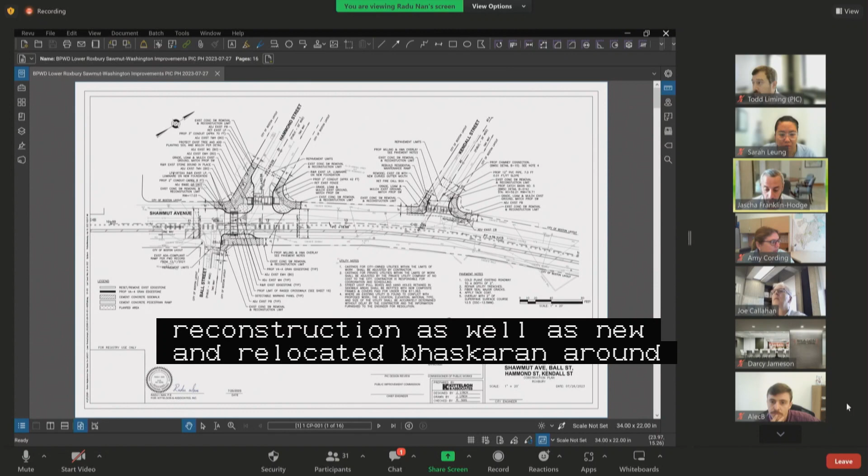So moved. On to first item of business, public hearing number 1, on a joint petition by the City of Boston Transportation Department and the City of Boston Public Works Department for the making of specific repairs within the following public ways in Boston proper and Roxbury, consisting of curb realignment, roadway and sidewalk reconstruction, as well as new and relocated pedestrian ramps, street lighting infrastructure, storm drain infrastructure, landscaping, driveway curb cuts, median islands, and raised crosswalks. Shawmut Avenue, generally between Hammond Street and Lenox Street. Washington Street, generally between Thorndike Street and Lenox Street / East Lenox Street. Hammond Street at Shawmut Avenue. Kendall Street at Shawmut Avenue. Lenox Street at Shawmut Avenue. East Lenox Street at Washington Street.

So it's new business on July 13th, 2023, as shown on a set of plans entitled City of Boston Public Works Department Engineering Division Specific Repairs Plan. Shawmut Ave, Ball Street, Hammond Street, Kendall Street, Lenox Street, Washington Street, Thorndike Street, East Lenox Street, Roxbury, 16 sheets dated July 26, 2023. Would the proponents please introduce themselves, their affiliations, give us a brief overview of the project, and let us know about any changes since your new business hearing. And after that, we'll open up the floor for commissioners to ask questions.

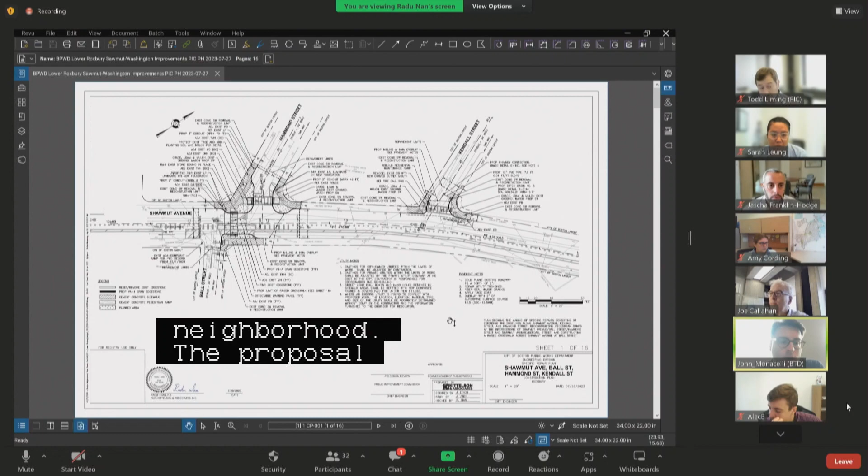Thank you, Commissioners. Good morning. My name is John Monacelli, representing the Transportation Department in this petition here. This is a joint petition with the Public Works Department. We've also been in close coordination with an advisory committee with the community, as well as the councilor's office, with these improvements to create and solidify various geometric and traffic calming elements in the Lower Roxbury neighborhood. The proposal includes some curb extensions and geometric changes, ramp reconstructions for accessible compliance, traffic calming measures such as raised crosswalks, street lighting improvements coordinated through the street lighting department here at Public Works, as well as some green infrastructure included into the depaving, in accordance with the depaving policies of the streets cabinet.

I'm joined here by our consultant representative, Radu Nan. We do have a few notes here. The plans on the screen have not been revised since the new business proposal. We have 2 to 3 outstanding comments, some from the street lighting department, as well as 1 or 2 from the Disabilities Commission that we are attending to. I'll let Radu speak for a moment. We'll take some questions, but ultimately we're going to request an approval on condition of addressing those to the satisfaction of the respective departments. Thank you.

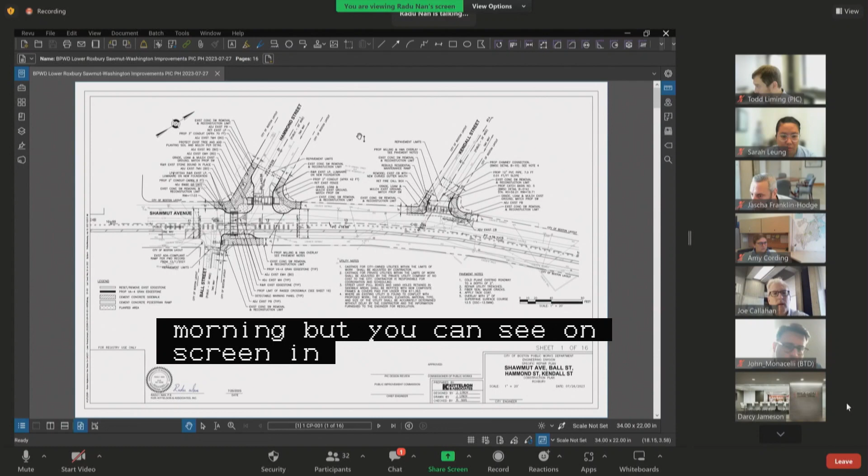Good morning, Chair and members of the Commission. My name is Radu Nan with Kittelson Associates, supporting the Public Works Department and BTD. I may go off camera because my internet is a little bit shaky this morning, but you can see on screen the first area of proposed specific repairs introduced two weeks ago, extending the curb lines and edge lines on Shawmut Avenue and Hammond Street to create new space for pedestrian ramps, the reconstruction of sidewalks around those pedestrian ramps, and the creation of some pervious spaces. We're retaining and protecting a street tree on Hammond Street and constructing a raised crosswalk across Shawmut Avenue, roughly between Ball Street and Hammond Street. At Kendall Street, we are realigning the edge lines to create accessible pedestrian ramps and reconstructing the sidewalks around those areas. The street lighting at Hammond Street and Shawmut Avenue is also being rearranged.

The existing poles are being relocated to be closer to the new location of the crosswalks and the pedestrian ramps that are being reconstructed at that intersection.

The next location, we're constructing a maintenance driveway for Ramsey Park for the park department, roughly south of Lenox Avenue, between Hammond and Lenox.

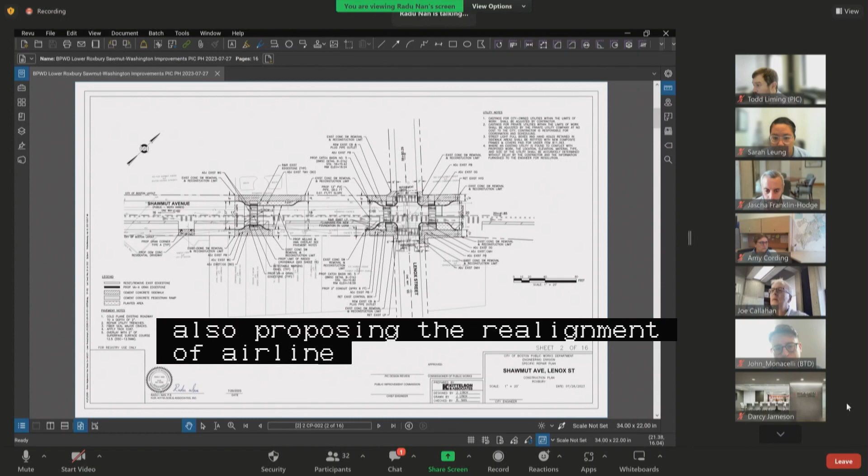We're also proposing the realignment of edge lines and the construction of a raised crosswalk roughly at 616 Shawmut Avenue, to align with pedestrian walkways within the residential area just northwest of Shawmut Avenue.

At Lenox Street and Shawmut Avenue, we're proposing the extension of the edge lines along Shawmut Avenue, the reconstruction of pedestrian ramps, the reconstruction of sidewalks, and the introduction of new pervious spaces along those curb extensions.

The following location where specific repairs are proposed is along Washington Street on the north side, roughly at Thorndike Street. At this location, we're proposing reconstructing the existing brick sidewalk, a pedestrian ramp, realigning the edge lines to position that pedestrian ramp closer to traffic lanes, and the introduction of a pedestrian median island in the center of Washington Street.

Additional changes at this location include new drainage infrastructure work and street lighting work to correspond with the new location of the crosswalk and the improvements. A small impervious area is being created as well.

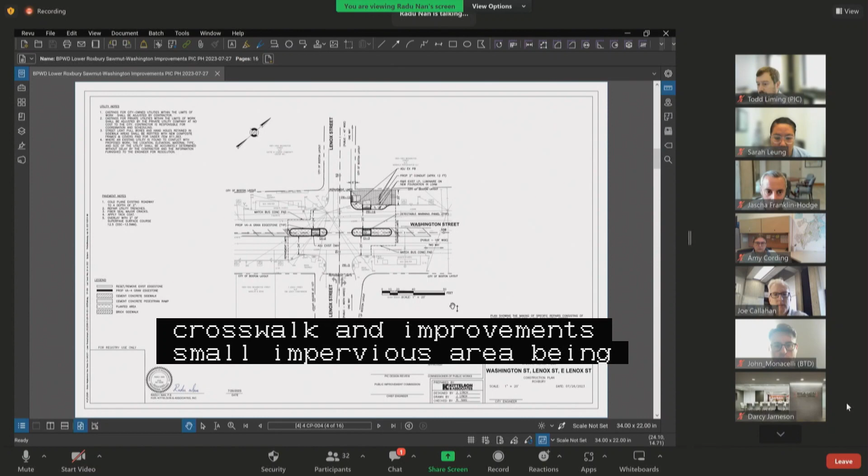And finally, the last location where specific repairs are proposed is at Washington Street and Lenox Street, on roughly the north corner of that intersection. Again, edge lines are being realigned, pedestrian ramps are being reconstructed.

And the existing brick sidewalk is being rebuilt in this area, as well as the construction of two pedestrian islands in the center of Washington Street, to promote safer crossing and shorter crosswalks for pedestrians using the Silver Line stations located on either side of Lenox Street along Washington Street.

Those are all the specific repairs proposed, and as John mentioned, these plans do not show any additional work from what was previously presented at the new business meeting, but we are still working on some finer details and locations of street lighting and pedestrian ramps within this area.

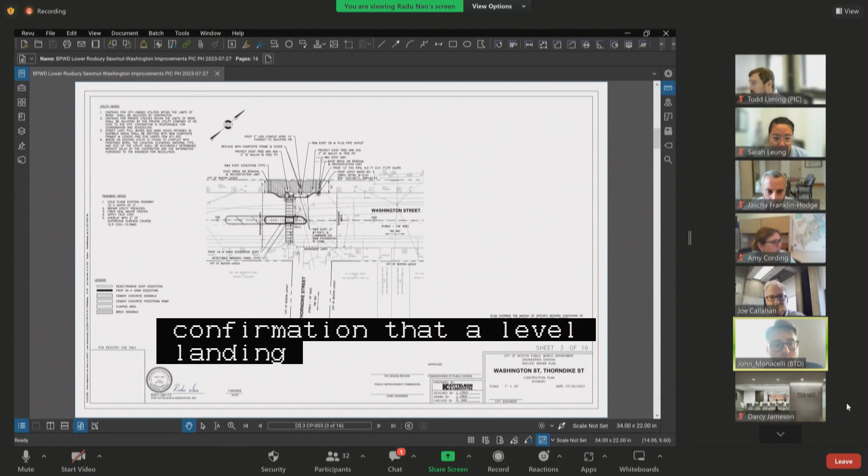And just to be clear, the pedestrian ramp comments from the Disabilities Commission - one was a confirmation that, Radu, if you can go to the Thorndike sheet, the level landing being proposed was not in conflict with the tree pit there at the north or top of the page. So we're just going to provide a few more details on widths and a zoomed-in piece for the commission's satisfaction, but that doesn't require any reconstruction or redesign there.

And then the other piece is an open item about the ramp reconstructions that were not originally included. Internally, there were some conversations about how to take care of those in a more expeditious manner, so we're going to finalize that and get back to the Disabilities Commission.

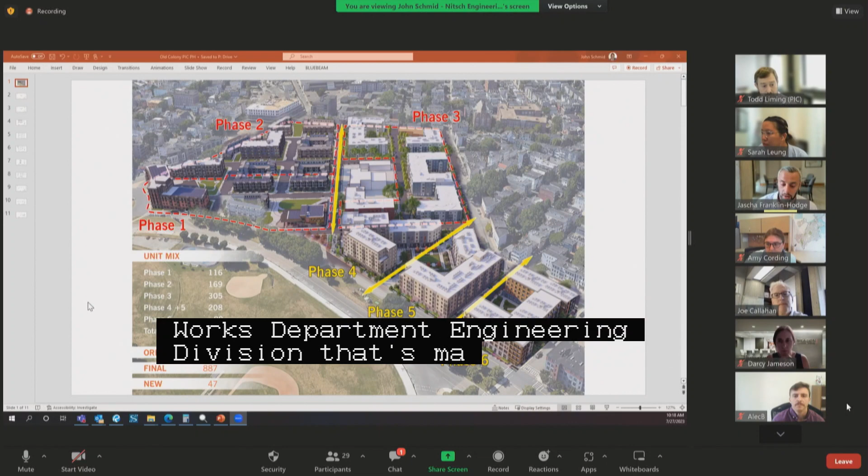This was new business on July 13th, 2023, as shown on two plans entitled City of Boston Public Works Department Engineering Division Pedestrian Easement Plan, Columbia Road, South Boston, one sheet dated June 13th, 2023, and City of Boston Public Works Department Engineering Division Pedestrian Easement Plan, Old Harbor Street, South Boston, one sheet dated July 18th, 2023. The proponents please introduce themselves, give us a brief introduction to the project and this action, and let us know if there have been any changes since your new business hearing.

Good morning, John Schmid with Nitsch Engineering. Darcy, I believe Jameson's on the line, but perhaps she's having connection difficulties. We were here a couple weeks ago for new business, and it's for phase 6 of the project. This is the final phase of the Old Colony redevelopment that started probably 15, 20 years ago. We're excited to bring the project to closure.

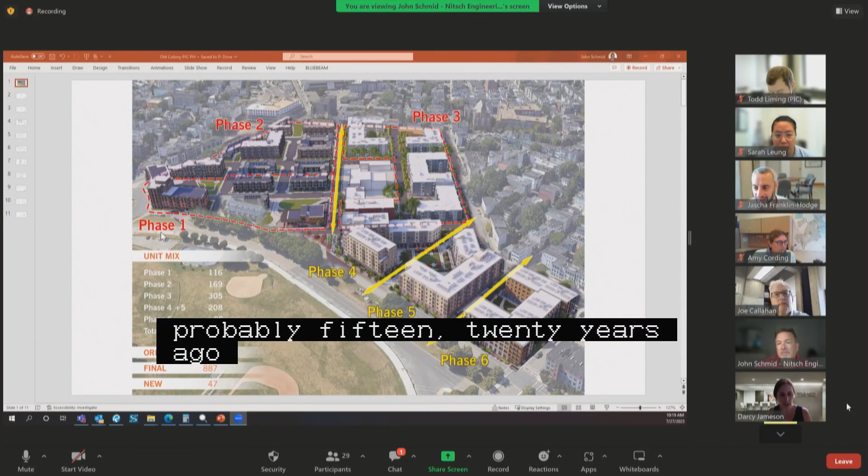There it starts. Can anybody hear me? Yes, we can hear you, Darcy. Now we can't. Darcy, we can't hear you. I'll move ahead to the actions. Can you guys hear me? Now we can, we can hear you now. Okay, sorry about that. Hi everyone.

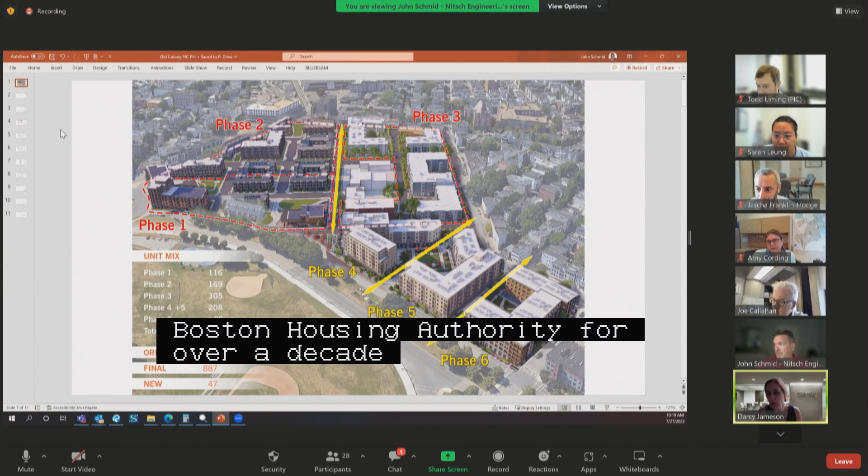Thanks, John. So I'm Darcy Jameson, Vice President of Development at Beacon. I've been working on Old Colony with the Boston Housing Authority for over a decade. We're here today for the last building, which is incredible, joined by, of course, John Schmid, who's been working with me all the way along, Brianna Kahn, Carla Chafee, who's our land use attorney at Nixon Peabody, and Letitia Raymond from the Boston Housing Authority.

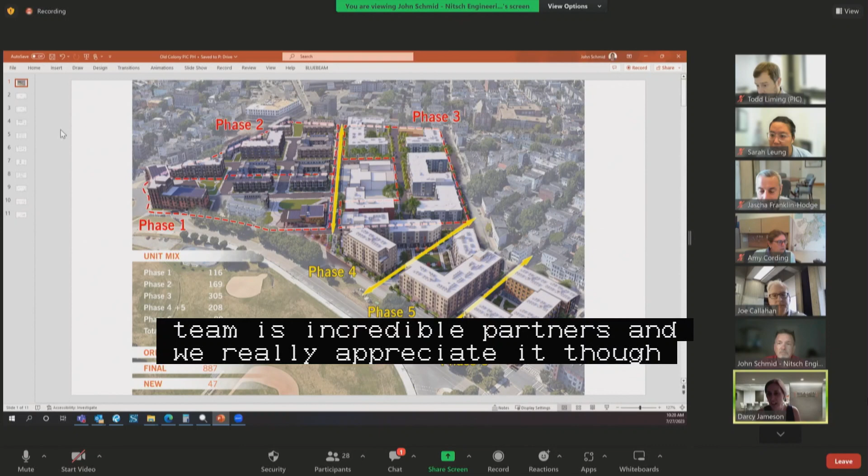So, short and sweet, I just want to say thank you to everybody. This has been an incredible journey. It takes a lot of teamwork and cooperation, understanding challenges, constraints, realities of financing, physical constraints, and the city has just been, and the PIC team, incredible partners, and we really appreciate it. So I think that's all I have to offer today, just my appreciation and thanks, and I'll turn it over to John, looking forward to wrapping this up.

And I think folks know this project was funded by the state, so we're on closing track, which is terrific. Thank you, Darcy.

So the first application here is for the creation of a pedestrian easement on Old Harbor Street between Columbia Road and East 8th Street. Although the drawing does not indicate this, the easement will be extended to East 8th Street as requested by the commission this past few days. The easement is approximately 1.1 feet wide, and again the Mylars will reflect the full extent of the easement. The second pedestrian easement request is on Columbia Road, which will start at the edge of phase 5 and extend again to the intersection of Old Harbor Street. This was the request shared with us this past few days, so the final Mylars will reflect the extension of that 5.5-foot easement to the intersection of Old Harbor Street.

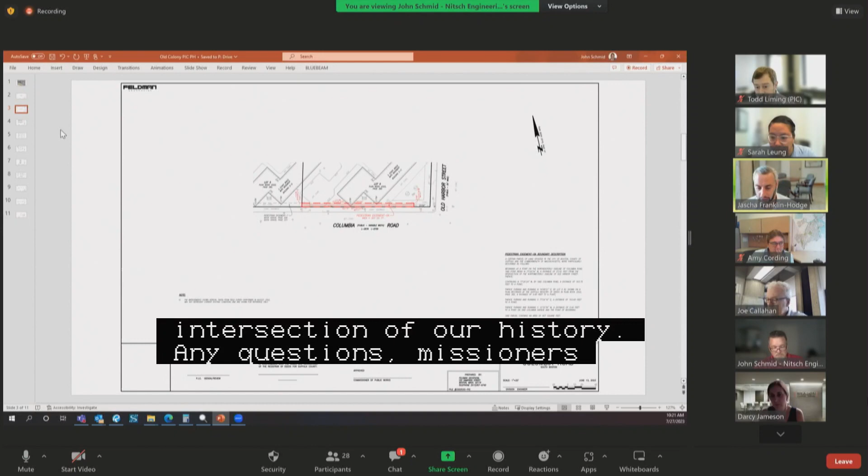Any questions? Commissioners? PIC staff or members of the public? I don't see anyone from the public. I do want to thank the project team for being so flexible with us on all of our plan comments and coordination. It's taken a lot to get to this point, but they've been great.

All right, hearing no other questions or comments, do I hear a motion to approve public hearing number 2? I'll make a motion to approve a joint petition by Old Colony 6 Bonds Limited Partnership and Boston Housing Authority for the acceptance of pedestrian easements in Columbia Road and Old Harbor Street, as read into the record by the chair. Second. All in favor? Aye. Aye. Any opposed or abstained? So moved.

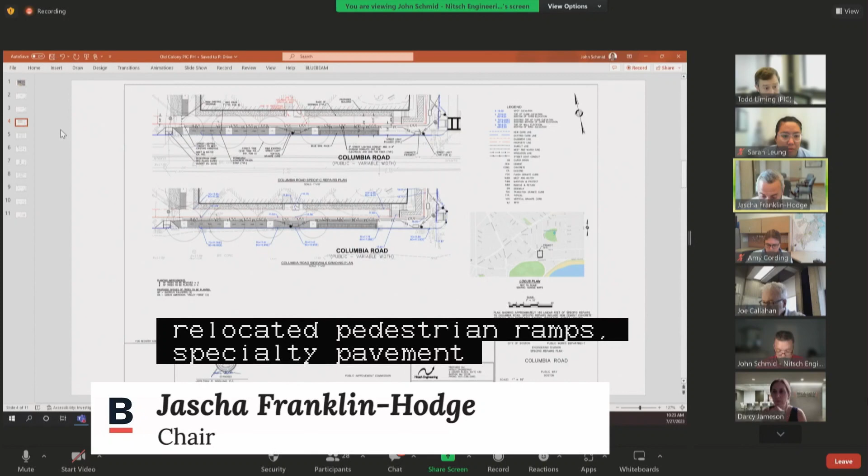Good morning again, John Schmid with Nitsch Engineering on behalf of Beacon Communities.

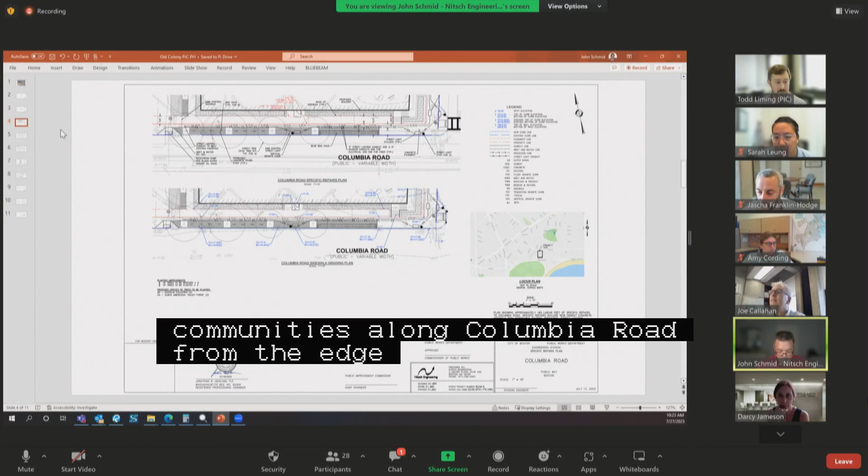Along Columbia Road from the edge of Phase 5 to the intersection of Old Harbor Street, we are proposing a new vertical granite curb, a new cement concrete sidewalk, 2 new streetlights with pull boxes, conduit, and shadow conduit. We are providing a 5-foot furnishing zone with a blue bike station, 8 bike racks, 4 trees, and pervious pavers.

As we just recently approved, that's what triggered the need for the 5.5-foot pedestrian easement that was just recently approved. We're also maintaining the ramp at the termination of Gate Street as approved in the Phase 5 plans.

Any questions, commissioners? PIC staff or members of the public?

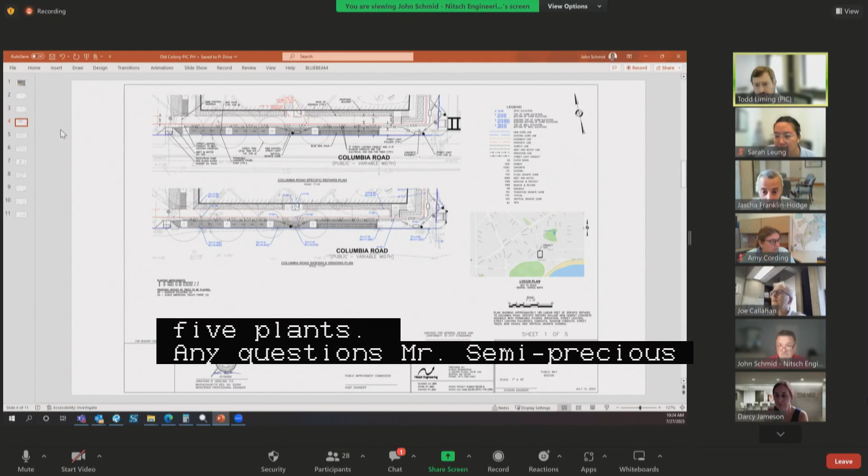I did have just one very quick question. At the intersection of East 8th and Old Harbor, one of the curb extensions looks like it, I think on the southeast corner, might potentially be in conflict with a catch basin. Can you just confirm that, John, and if the plans need to be adjusted before Mylars?

Yeah, let's talk about, I'll give you an overview quickly of Old Harbor Street. We have new vertical curb, new cement concrete sidewalk, 4 new streetlights with pull boxes, conduit, shadow conduit, a 4-foot furnishing zone with 5 new street trees and pervious pavers. And this also has new bump outs for the pedestrian ramps on the southern side of Old Harbor Street, as coordinated with BTD.

As I move to the next one, East 8th Street, we have new vertical curb starting at the edge, new cement concrete sidewalk, 2 new street lights with pull boxes, conduit and shadow conduit. There is no furnishing zone in this area, which is consistent with previous Phases 4 and 5. We have about 7 feet from the back of curb to the property line, and we are providing a 5-foot minimum or greater path of travel at the pinch points.

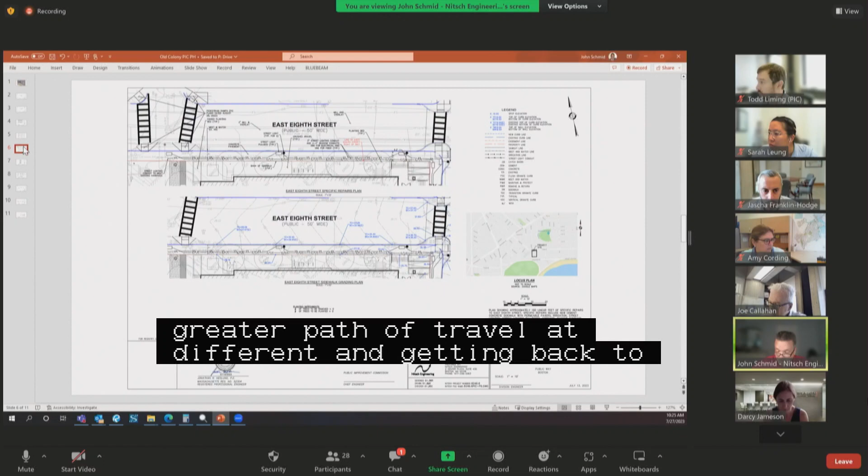Getting back to Todd's question, regarding the conflict with the catch basin at 8th Street, we will take a look at that, and whatever corrective measures have to be made, we'll review with you and provide on the Mylars when submitted. Thank you.

All right, commissioners, any other questions, comments on the other sheets that we've just seen? John, will we now get a composite maintenance agreement for all the phases, so the city will have one comprehensive maintenance agreement covering all the phases?

I'll look to Darcy to speak to that. That is not something that has been raised. So, hi, Para, good to see you. Hi Darcy. So we are extremely excited that you are at the last phase, so rather than having 5 little babies, I think it will be good to see if we can work with our legal counsel to have a composite document.

Because otherwise when something needs to happen, we will be chasing 5 little documents versus 1 document. Guidance from Mr. Liming and our corporation counsel will be truly appreciated. Para, we will look into it. The only thing, and I will circle back, we'll talk offline—the only thing I have to think about is each project is owned by a separate entity.

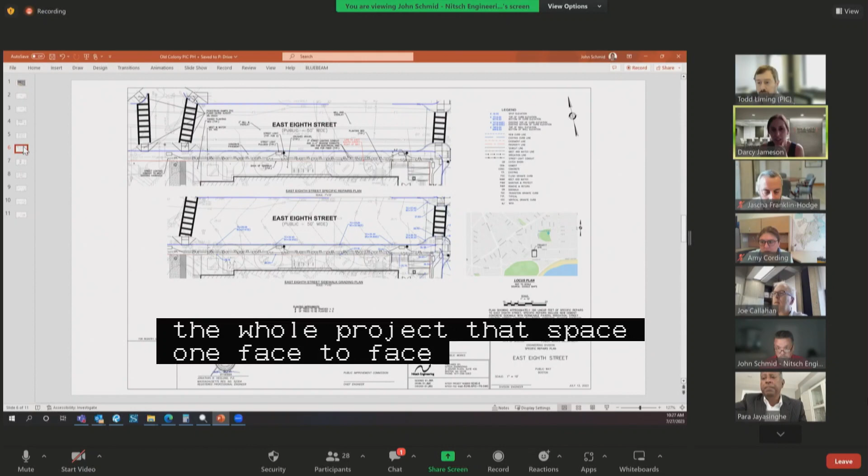Oh, never mind. Okay, so Darcy, that's going to be awkward. So PIC staff needs to be a little bit more diligent to ensure that we were not looking at your whole project as Phase 1, Phase 2, Phase 3, but like Alpha Bravo Charlie David. Yeah, I think, unfortunately, we'd like to think of it as one, but it is multiple. I think that's got a hiccup.

But it's still Beacon who oversees everything, and all you have to do is call me, and we'll figure it out with you. Darcy, you've been so gracious. We may not always be there, so legal, smart lawyers will sort it out. Thank you, Darcy. Okay, fair enough, we'll take a look.

Commissioners, any other questions, comments? PIC staff, members of the public? All set. Hearing none, do I hear a motion to approve public hearing number 3?

I'll make a motion to approve a joint petition by Old Colony 6 Bond Limited Partnership and the Boston Housing Authority for the making of specific repairs in Columbia Road, Old Harbor Street, and East 8th Street, as read into the record by the chair.

Second. All in favor? Aye. Any opposed or abstain? So moved. Thank you very much, and congratulations to the project team on getting to this final phase of this very transformative project.

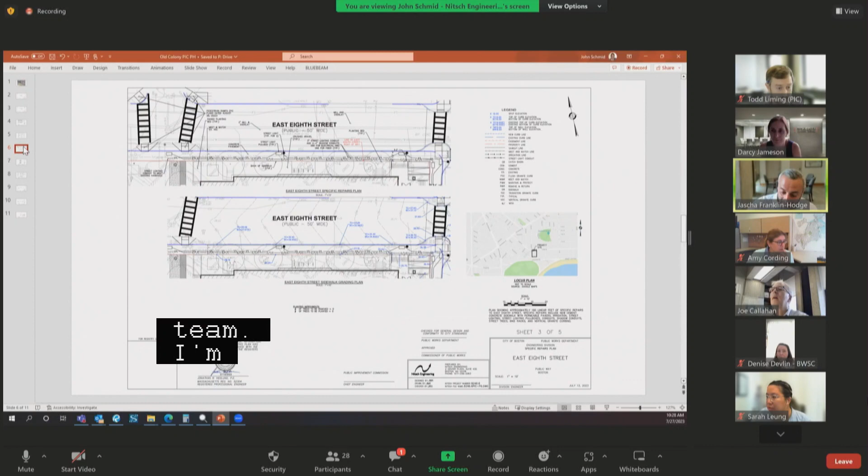On to public hearing number 4, on a joint petition by Old Colony Hub LLC, Old Colony Phase 3A4 Limited Partnership, Old Colony Phase 3A9 Limited Partnership, and Old Colony Revitalization Corporation for the acceptance of a pedestrian easement adjacent to Dorchester Street public way, South Boston, located on its southeasterly side, generally between Reverend Burke Street and East 9th Street, new business from July 13th. Shown on a plan entitled City of Boston Public Works Department Engineering Division Easement Plan, Dorchester Street between East 9th Street and Reverend Burke Street, South Boston, one sheet dated July 13th, 2023.

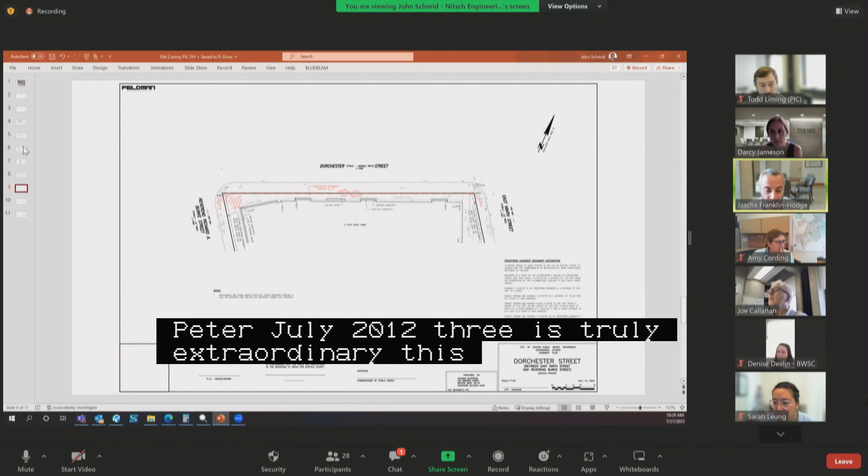Will the petitioners please introduce themselves and give us an overview of the project and an update on anything that's changed since your new business hearing? Good morning. I'll just start and then hand it to you, John.

So just by way of reminder for everybody, ages ago the city had asked if we could put some street trees in along Dorchester, and we are going to do that. Then over the last couple of weeks it was a question of could we also do some sidewalk work there. So working with the city, my folks at Beacon, and the BHA, I shook the piggy banks. We can do the sidewalk work for the city, and we've worked with Todd and everybody to reach an agreement on that, so that's terrific. It's the right thing to do, so we're thrilled to be able to accommodate the request.

We've reached out to our lenders and investor, and I think we're fine on the easement request. Carla still has to give everybody the actual easement document to review, and we need to get it all executed, but barring any challenges or questions, I think we're in good shape to wrap all that up and proceed with doing the sidewalk work and the trees. From what I understand, this approval will give us what we need to do that, and that'll be great.

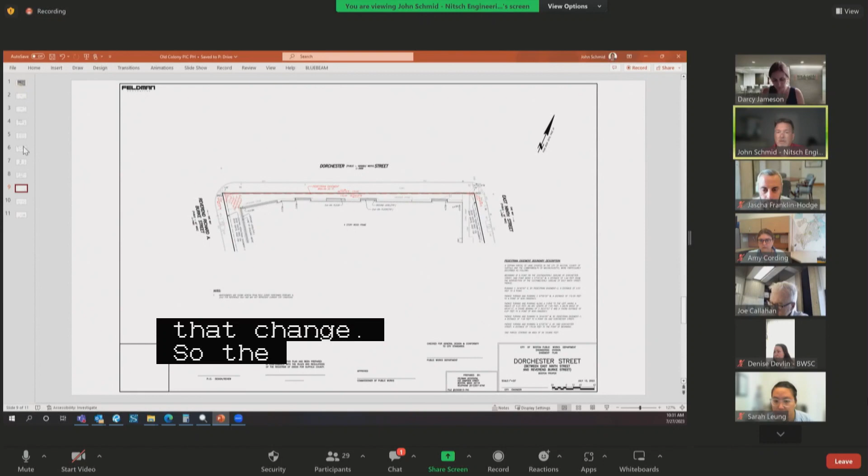So, John Schmid, Nitsch Engineering. The installation of 4 new street trees requires the widening of the sidewalk in order to provide a 5-foot clear minimum path of travel. In doing so, we are requesting an easement that's approximately half a foot wide along Dorchester Street between Reverend Burke and East 9th Street. Any questions?

Commissioners? I just want to thank the team for pursuing this easement as well as the sidewalk improvements in order to get an accessible path of travel. We really appreciate your hard work during these two weeks. Absolutely, thanks Amy.

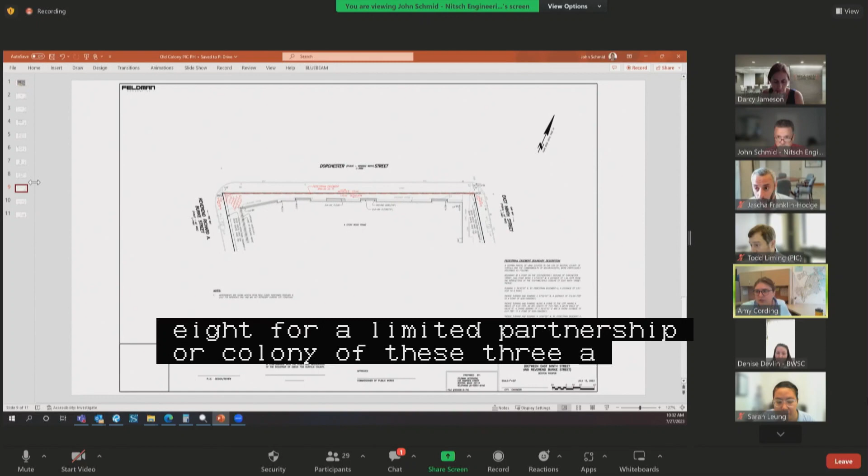So moved. On to public hearing number 5, on a petition by Old Colony Hub LLC for the making of specific repairs within Dorchester Street public way, South Boston, located on its southeasterly side between Reverend Burke Street and East 9th Street, consisting of sidewalk reconstruction with structural soil, as well as new street trees. New business from July 13th, 2023, as shown on a set of plans entitled City of Boston Public Works Department Engineering Division Specific Repair Plan, Dorchester Street between East 9th Street and Reverend Burke Street, Boston, 2 sheets dated July 13th, 2023.

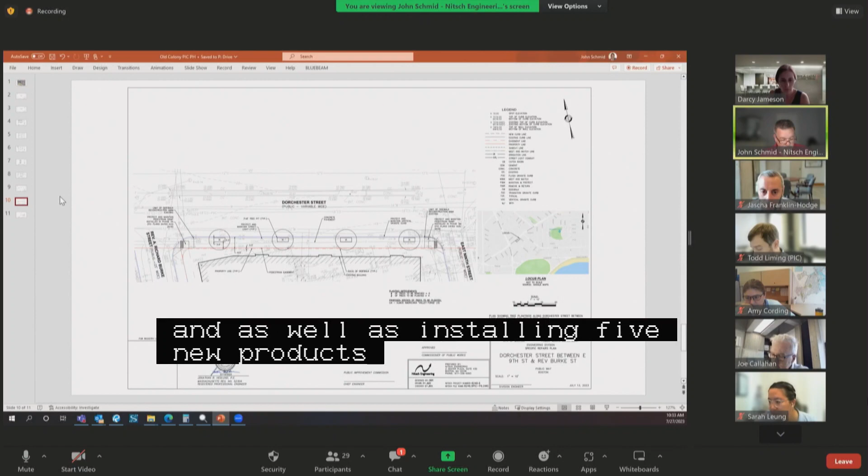Proponents, please reintroduce yourselves and give us a brief overview of the proposed change and any updates since new business. Good morning, John Schmid with Nitsch Engineering. We'll be reconstructing the sidewalk between Reverend Burke Street and East 9th Street, as well as installing 5 new public street trees. We will have an 8.5-foot wide sidewalk, but 3-foot tree pits, so we are maintaining a 5-foot clear path of travel between obstructions. Any questions?

I believe the proponents, in lieu of the somewhat unique circumstances of how this project came to be, have requested a waiver from certain deposits and fees that the city's Public Works Department would typically charge for a permit to do sidewalk work. I would just like to confirm that the proponents intend to construct this in full compliance with city specifications and requirements, particularly as it pertains to ADA compliance for ramps and sidewalks, and that irrespective of whether any of those deposits and fees are waived, the proponents will work with the city to ensure the final product meets the city's needs.

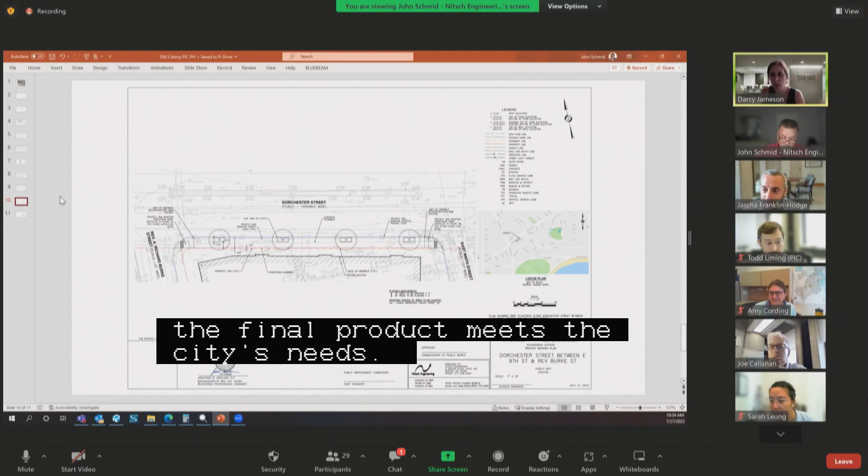I mean, the simple answer is yes, we're gonna build what we're showing on John's plans. And I think that's the full scope. I guess the hesitation I'm hearing is we have pretty limited resources to do this, so I just want to make sure before we agree to do all this, we're in 100% agreement on the scope, so I don't have any surprises financially. But I think we're all on the same page.

Yeah, that is the intent of this hearing, is to agree on the scope and formalize that. The city typically has deposits that are used to ensure the product is constructed in alignment with what is shown here. Since there was a waiver requested, I just want to affirm that you intend to construct as shown, subject to final review and sign off of the city, but we're certainly not intending to expand the scope beyond what is shown here. Okay, excellent.

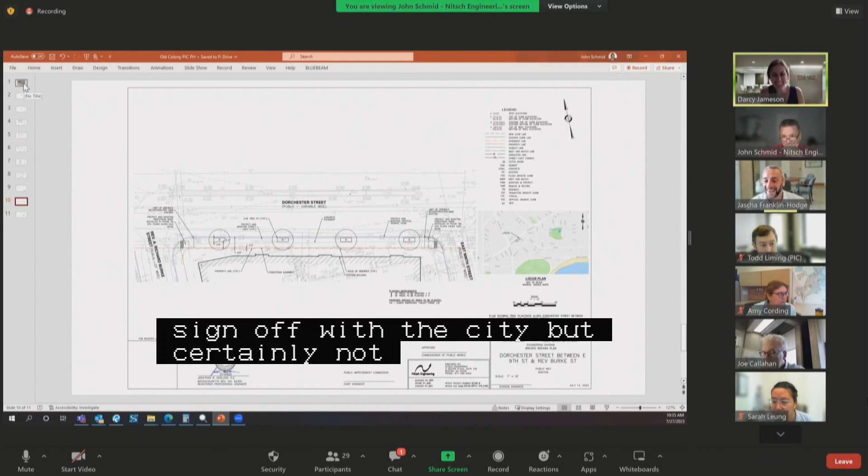Commissioners, any other questions or comments? Oh yes, I'd just like to make a couple of comments. There's a 20-inch water main in the sidewalk there, and we don't want trees over the water main. It looks like it's right on top of it.

Yeah, Denise, I raised this question when the plans were presented to me last week, because I'm not the engineer of record, I'm stepping in for John Hedlund. He explained to me that we confirmed the water main is not there, it's actually in the street, and the record plans are wrong. Oh, okay, all right.

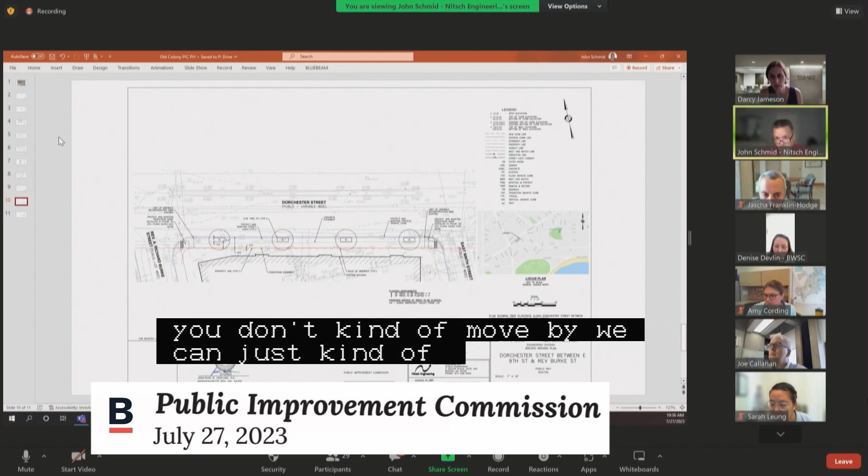Actually, so then the other issue is we were actually replacing the water main in 3 years. Okay, so that's fine, if that's where it is. I'm not questioning you or anything like that, but I don't want to make things complicated for you. I don't know if we can make it contingent upon us reviewing it, that way you can move on, but if we could just review that with you, that'd be great. Yes, I will ask John Hedlund to confirm with you when he returns that you're in agreement with where the water line actually is.

If I might, this is Colin Horser from Nitsch Engineering. We confirmed with Phil Rock a few weeks ago about the location of the water main, and he has the records from the test pits as well. Okay great, yeah, then that's fine. I just want to make sure we're all in agreement, and if we could still do that after the meeting, that'd be great. Denise, that was the first thing we really did, was go do the test pits to make sure we all knew where it was, because we knew there was some debate.

Okay, so all right, great, thank you, Darcy. Yeah, I'll circle back with you, but I think we're in good shape. All right, great, no, I appreciate it, thank you. Any other questions, comments from the commission, PIC staff, or members of the public?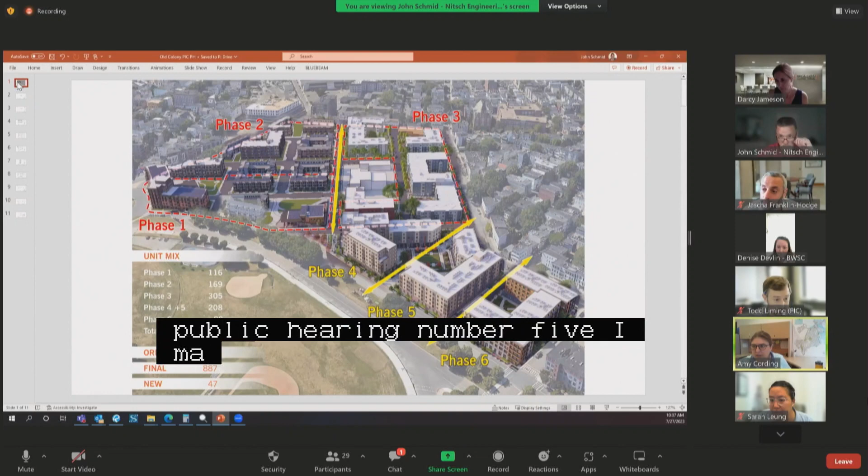All set. Do I hear a motion to approve public hearing number 5? I'll make a motion to approve a petition by Old Colony Hub LLC for the making of specific repairs within Dorchester Street as read into the record by the chair. Second. All in favor? Aye. Aye. Any opposed or abstain? So moved. Thank you all very much, thanks to everyone.

All right, on to public hearing number 6, on a petition by Verizon New England Incorporated for a grant of location with lead company status and no participants to install new telecommunication conduit with city shadow within Mount Pleasant Avenue, public way, Roxbury, generally located from address number 39 at Mount Pleasant Terrace to Forest Street. New business from July 13th, 2023, as shown on a plan entitled City of Boston Public Works Department Engineering Division Grant of Location Plan, Verizon 39 Mount Pleasant Avenue, proposed conduit installation, 1 sheet dated April 2023. Would the proponents please introduce themselves and give us a brief overview of the project and any updates since your new business hearing.

Good morning, James de Iturrondo, representing Verizon New England. I'm just going to pop the plan up on the screen here. Verizon is petitioning to place approximately 322 feet of conduit with city shadow from our existing manhole to a proposed shared use handhole placed by Extenet Systems. No changes from the new business that I'm aware of. Are there any questions?

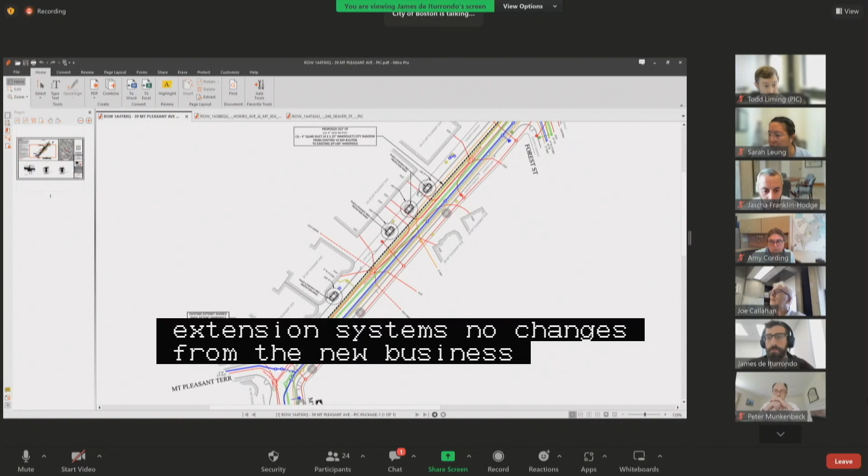I'll make a motion to approve a petition by Verizon New England for a grant of location in Mount Pleasant Ave, as read into the record by the chair. Second. All in favor? Aye. Aye. Aye. Any opposed or abstain? So moved. Thank you very much.

All right, we are on to the new business portion of the hearing. So we will dive right in with new business 1, 49 to 63 Hudson Street, Tyler Street, Boston proper, pedestrian easement, specific repairs, and a set of joint petitions by Asian Community Development Corporation and the Boston Redevelopment Authority, DBA, Boston Planning and Development Agency. Would the presenters please introduce themselves, their affiliations, provide us a brief overview of the project and the various actions you are proposing, after which we will go to questions from the commission.

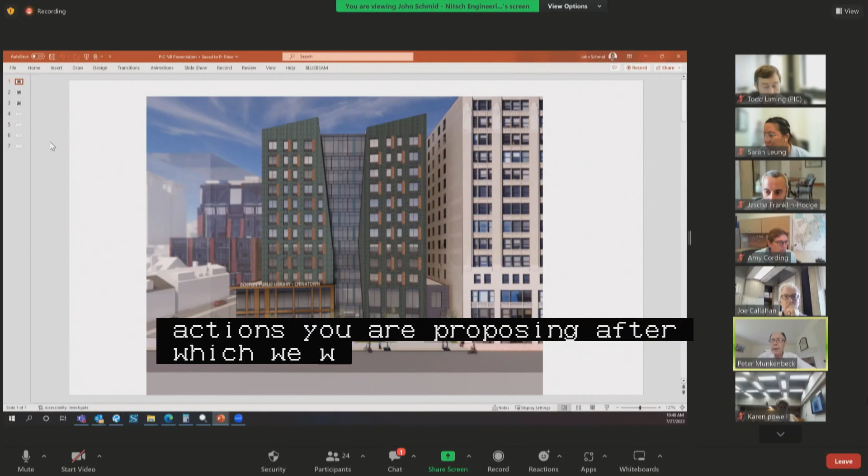Thank you, Mr. Chairman and members of the commission. Can I be heard? Am I hearing? Are you hearing me? Yep, we can hear you. Thank you. All right, my name is Peter Munkenbeck. I'm representing the Asian CDC. I think there's a lot of background noise from the City of Boston emblem there. I don't know if that can be muted. Maybe you can hear me over that. No, there we are. Yeah, we can hear you all right, but we'll work on that noise. Okay. It's from the City of Boston emblem there. And it seems to, yeah, it's overcoming the microphone. We can hear you. You can proceed. All right, I'll just carry on. You'll tell me if you can.

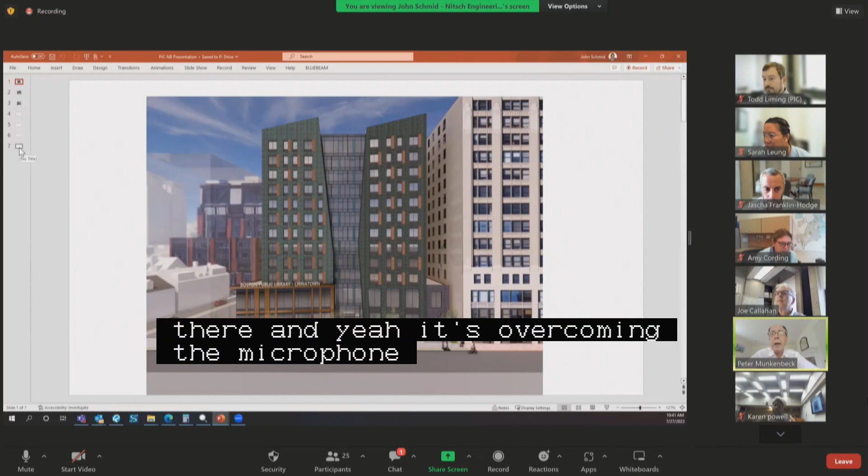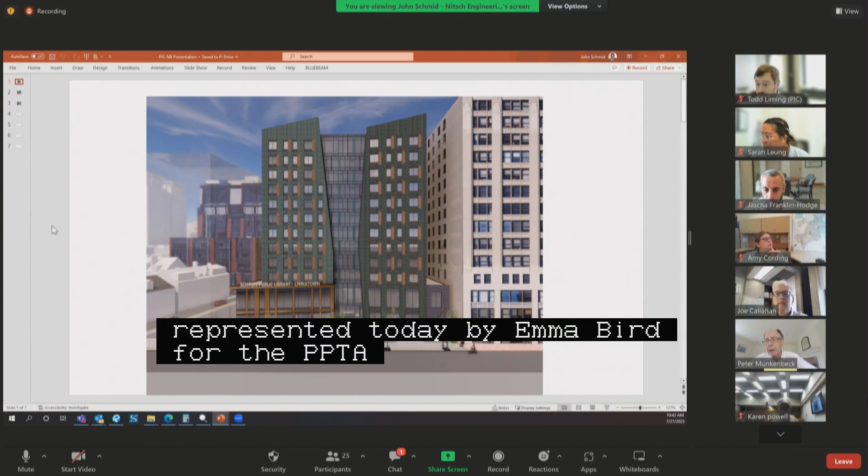So my name is Peter Munkenbeck. I'm representing the Asian CDC, with whom I've been working for 30 plus years on a series of developments in Chinatown, this being the latest substantial development. The members of our team who are here are John Schmid representing Nitsch Engineering on behalf of Jonathan Headland, who's on leave. And we also have Billy Kahn from Asian CDC, and the landowners are represented today by Emma Bird for the BPDA, and she has perhaps colleagues with her. We also have our attorney, Peter Kachansky from the firm of Goulston & Storrs, if there are any questions relating to the legal status.

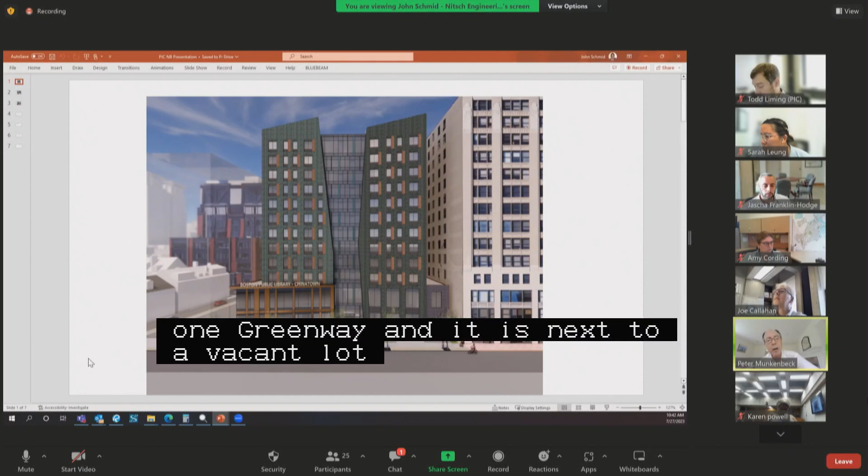So I will just briefly give context and then turn it over to John to go through the actual easement and improvement drawings. The property is on Hudson Street, just off of Kneeland Street, behind that very large building you see to the right, which is 75 Kneeland. It is across the street from One Greenway, and it is next to a vacant lot, as you see on the left there. The property has a purpose of housing the Boston Public Library Chinatown branch. You can see that two-story portion there. It will also house 110 households, of which 66 will be renting and 44 will be owners, and all will be income-restricted units.

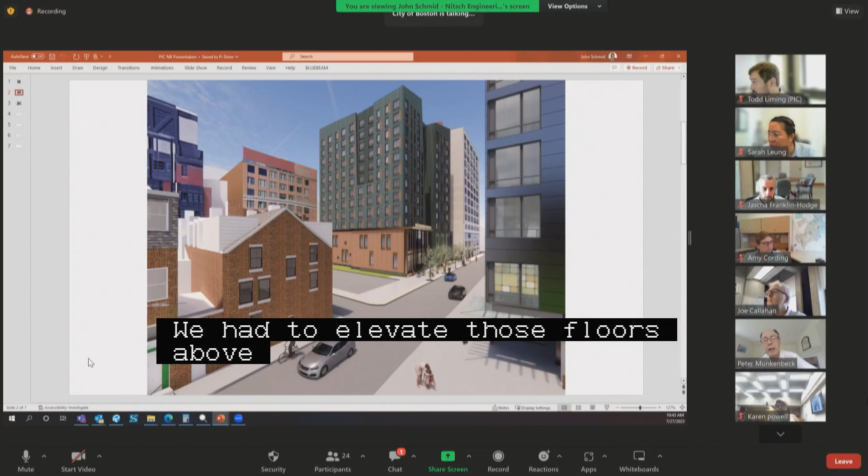The features of the property from the point of view of the public way are that we have a very substantial setback from the street along Hudson. We have a minor setback on Tyler. The main entrances and the main attraction will be on Hudson. A major challenge because of the elevation is that the floor plates of both the library and the housing, except for certain areas not sensitive to floods, had to be elevated 4 to 5 feet above the sidewalk. So some of the improvements relate to being able to access the building. So I'll turn with that to John Schmid and ask John if he would please narrate the specific repairs and the proposal. Thank you, Peter.

So the specific repairs along Hudson Street will include the installation of new granite curb, a new concrete sidewalk that provides a 6.1 clear path of travel, 2 new street lights with pull boxes, conduit, shadow conduit. We're also providing a 4-foot wide furnishing zone that consists of 12 bike racks. We are protecting and maintaining the existing 3 street trees. We're introducing pervious pavers and irrigation.

This sidewalk program also requires the creation of a 2.3-foot wide pedestrian easement, which is a separate action within this application.

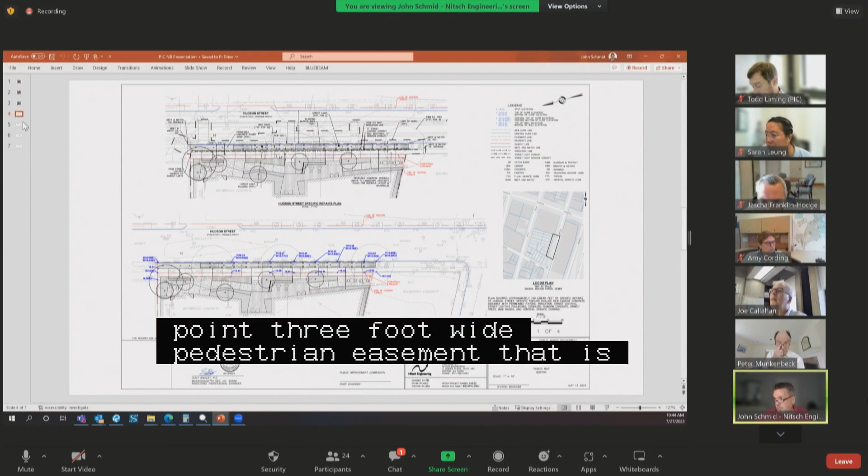Moving along to Tyler Street. Tyler Street has new granite curbing, a 5.2-foot concrete sidewalk, 1 new street light with pull boxes, conduit, and shadow conduit. We're providing a 3-foot furnishing zone, which includes 3 bike racks, 3 new public street trees, pervious pavers, and irrigation. This sidewalk program requires the creation of a 0.3-foot wide pedestrian easement along the frontage of the building.

One wrinkle, John, that I want to make sure we address is a rather slightly unorthodox curb cut to service the dumpster, wheeling out into the street, and being designed specifically so that it doesn't appear to be a handicap ramp.

Thank you. That's all I have, John. That's all I have.

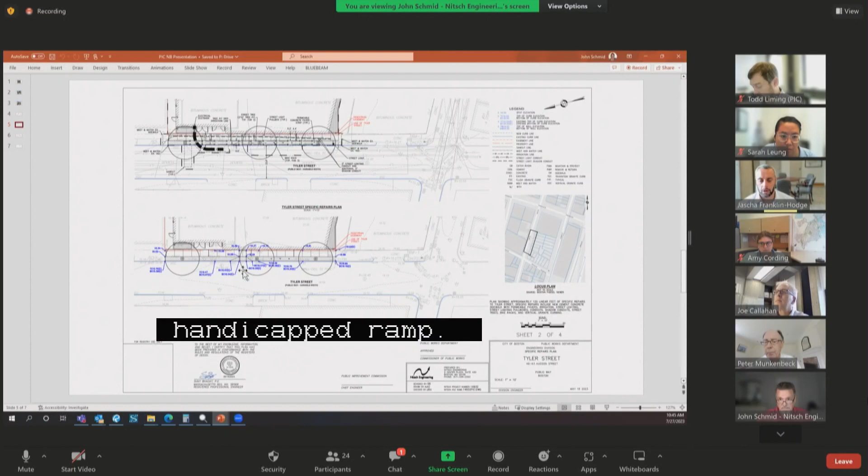Commissioners, questions? Hearing none, PIC staff. Sorry, Chief. Go ahead.

Amy, are you okay with the dumpster movement operations as it impacts Tyler being a one-way street and all our grandiose plans for Tyler Street? I'm not sure whether you got a sense of how the dumpster operations are going to come out. Tyler is an extremely narrow street with on-street parking on both sides and little room left.

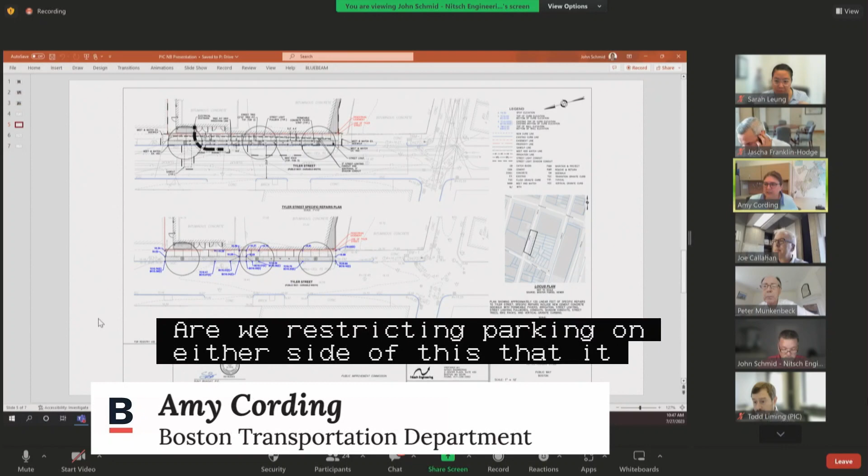Amy, that's just for you. Yeah, sir. No, right, similar—I guess I have a similar question I was going to ask. What's the parking situation in front of this? Are we restricting parking on either side of this so that it will make it look more like a ramp? Are we clearing space for it? And is it, the stuff comes to the sidewalk—can we get it out, or are you leaving it in the street?

We've asked for 60 feet of loading zone, beginning at the far left of our property line and coming back approximately a foot or two past that little ramp. There will be normal parking up until that ramp. If you're coming north on Tyler, which is the direction of traffic, there'll be ordinary parking until you get just to that ramp, and at that moment it will turn into a loading zone. The purpose is that a garbage truck is expected to pull alongside the curb just past the ramp, and the dumpsters will wheel out into the street, with an attendant there at the time the truck is there. The dumpsters will be unloaded onto the truck, and then wheeled right away back up into the building.

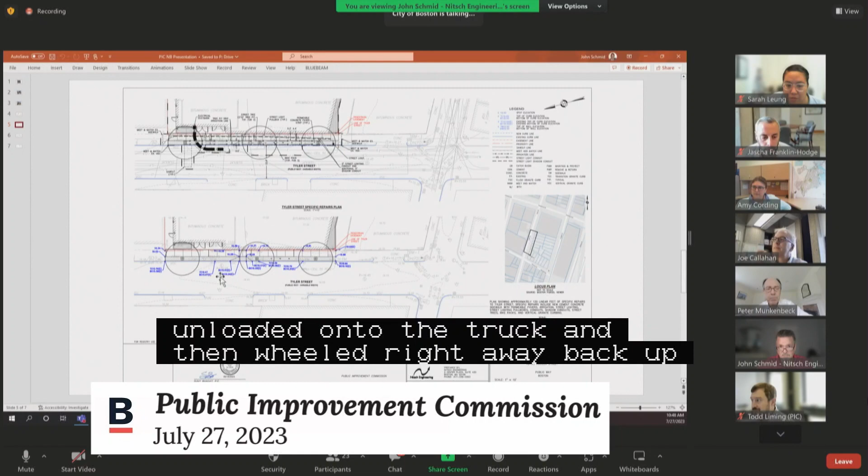Can I ask, where are you in the creation and approval of your construction management plan for this project? We have submitted a draft construction management plan to the department, and I do not believe we've received comments back on it.

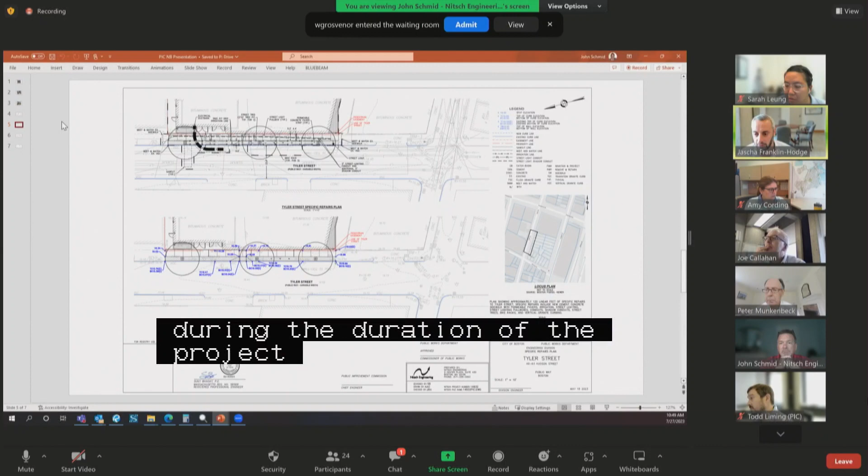Got it. I asked the question because we have had quite a bit of concern from folks in the Chinatown community about the impacts of construction projects on parking, given the very limited supply of resident parking in the neighborhood. I think the request is that as you work through finalizing that construction management plan, you work to minimize project impacts on parking during the duration of the project, and forestall those impacts as much as possible depending on how your work phases into the right-of-way. There are several other projects in the immediate vicinity wrapping up over the next 18 months or so, so depending on your construction timeline, the goal would be to not have so many projects impacting parking all at the same time. That's a matter to work through in the construction management plan, but I want to state that request here because it's created quite a bit of concern for both the Public Works and Transportation Department in conversations with the community. Thank you.

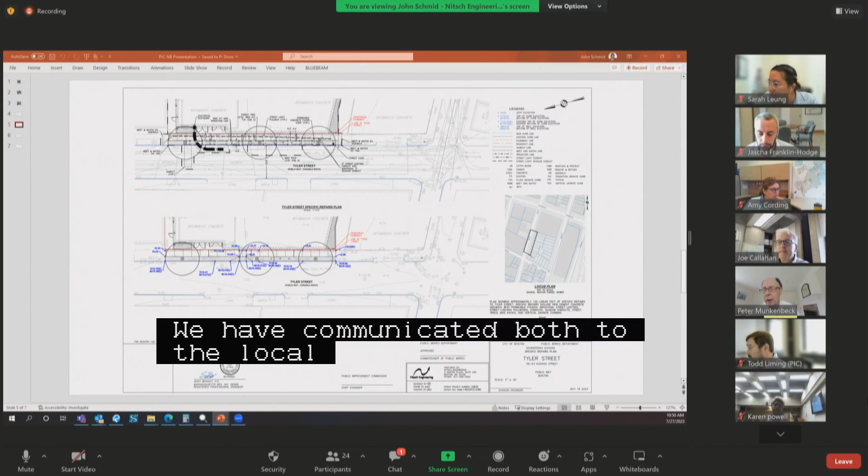We have indeed heard these comments, and Asian CDC, as you can imagine, has its ear to the ground in the community. We're very concerned about that. We have communicated both to the local city councilor as well as other officials associated with the mayor's office, and we are in a very intense dialogue to make sure we work as sensitively as possible on that issue. We will be removing approximately 12 spaces temporarily, and we'll be restoring eventually 6 of those spaces to ordinary parking, with the other 6 being distributed between the loading zone on Tyler as well as the pickup and drop-off zone on Hudson. But we'll restore about half of the parking that we temporarily removed.

Well, I appreciate your continued work on that and the sensitivity to the issue as you finalize your CMP.

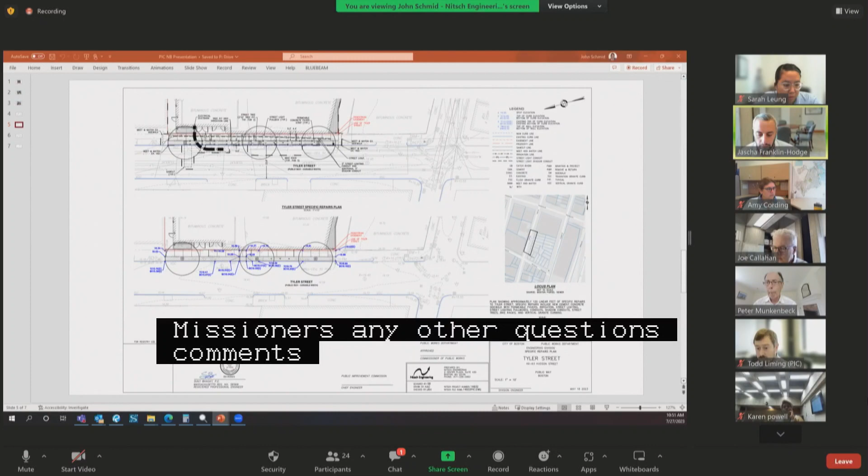I believe we had touched on this, Peter, a while back, but those proposed trees on Tyler Street, if they're going to be right adjacent to loading zones, we want to make sure the species aren't such that trucks pulling up to the curb will damage the trees once they become mature. Let's be thoughtful about that with your landscape architect.

Yes, indeed, that is part of the plan, and the landscape architect is integrated into the planning of the hardscape as well as the curbside uses.

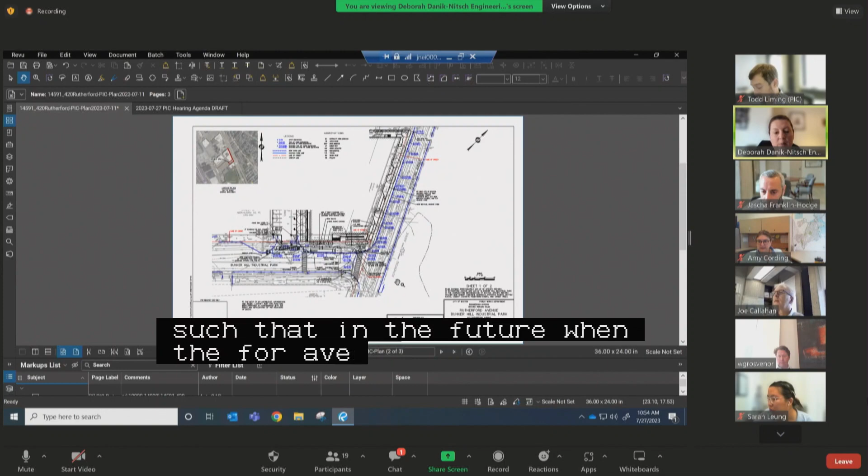We're proposing street trees, or the equivalent, kept within our private site, so that when the Rutherford Avenue improvements come through in the future, they won't be taking down trees that had been newly planted. We're proposing more robust improvements along Bunker Hill Industrial Park.

Right now the sidewalk along Bunker Hill Industrial Park stops at the corner of Rutherford Avenue. With the new building going in, we're proposing more pedestrian access along Bunker Hill Industrial Park on the north side, about a 7-foot wide cement concrete sidewalk with landscaping on either side, including a street tree near the curb. There are street lighting improvements happening, plus a blue light station, and trees at the back of the sidewalk intermixed with bicycle parking.

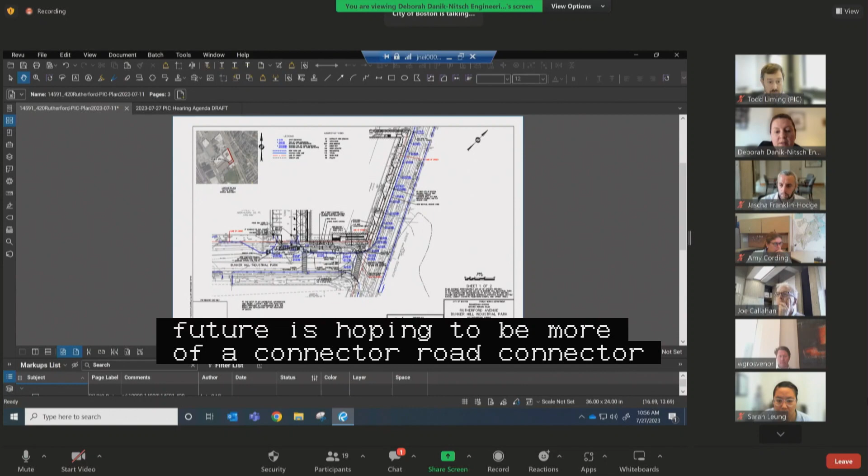We're also going to reconstruct an existing pedestrian crossing across Bunker Hill Industrial Park, as well as provide an accessible crossing at the project driveway, which we've coordinated on with BPDA transportation planning. In the future this is hoped to be more of a connector road through Hood Park to allow car access as well, so we'll have accessible accommodations for pedestrians to cross, and we're putting in more street lighting through this area.

That is the extent of our proposed improvements along the Rutherford Avenue portion in front of our site, Bunker Hill Industrial Park, across our site, and the driveway. If there are any questions, I'd be happy to entertain them.

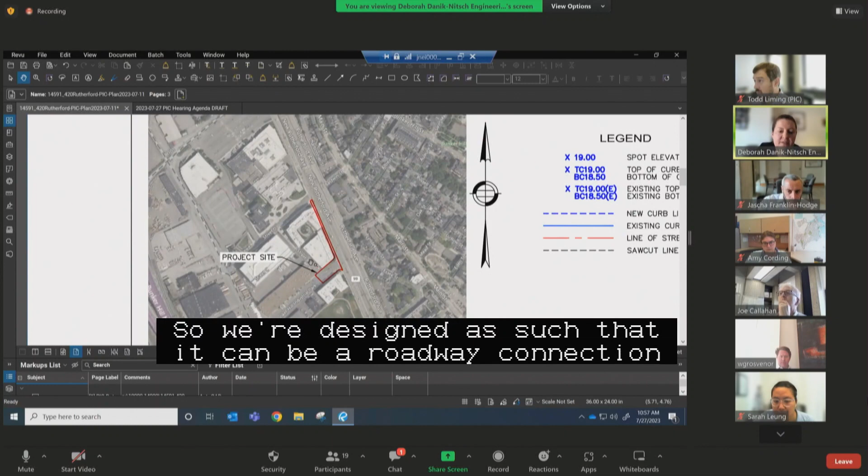We did consider that, but knowing the future goals of this driveway, we've designed it such that it can be converted to a public road, or the dimensions of one. This is called Street B right now, basically our driveway into a parking lot, so we're designing it so it can be a roadway connection through to Hood Park. Right now it's a private way, a private street, but we left it as a typical street crossing for pedestrians, knowing that in the future this could become a more robust public way access.

Deborah, I have a question for you. Does the project team or its contractor need any temporary easements within city property, within our sidewalks or those areas, to do the work?

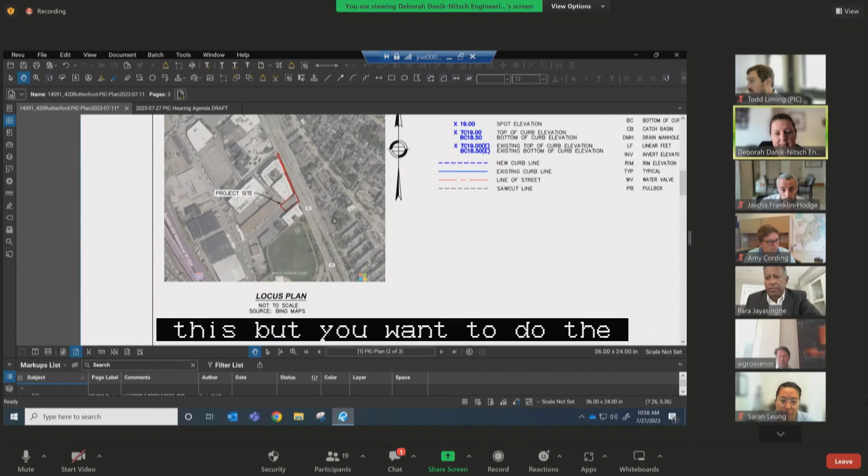There is a construction management plan. The project is under construction and they have taken some of the sidewalks to do the work. But actual easements, long-term, above or below grade, we do not need. The building is set back from the property line and we're able to provide the pedestrian paths of travel without any easements within the right of way.

Deborah, for some reason I wasn't aware that your project was under construction and occupying the city's sidewalks. I'm sure it's all permitted, but could you do me a favor and send to my office through PIC the totality of the sidewalks you are temporarily occupying?

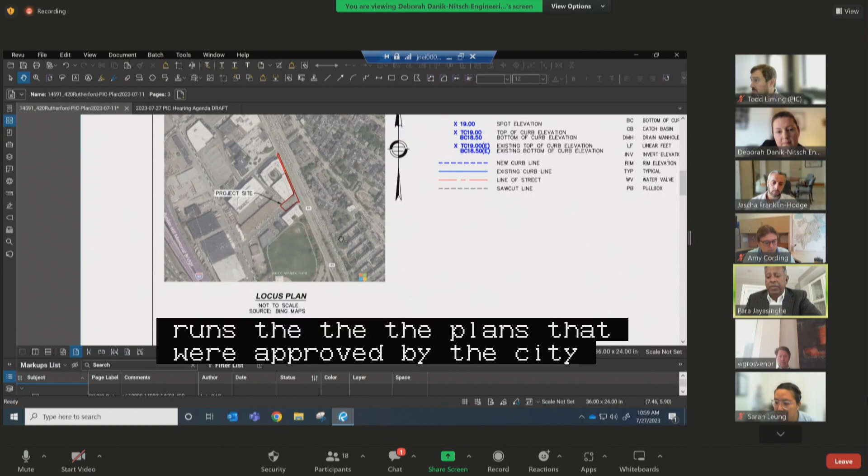Yeah, we can, within your project site, give the sidewalk permit, to the extent you can cross-reference the plans approved by the city and what is actually there. This way, if I have to take a look, I'll be comparing apples to apples, not apples and oranges. Absolutely, yeah.

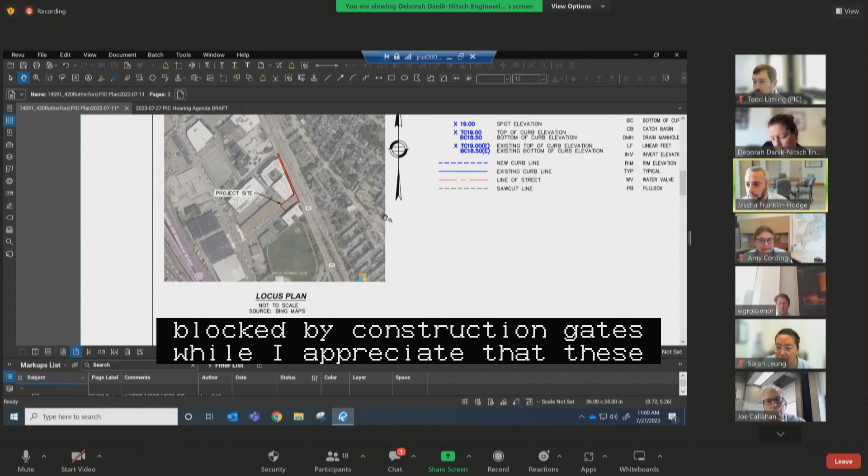Related to that, earlier, late last year, the city observed some really problematic conditions on the Rutherford Ave sidewalk adjacent to the project site. The sidewalk was in a state of great disrepair. At points it was diverted into the street without any accessible ramp, and even then the actual path of pedestrian travel was blocked by construction gates. While I appreciate these are temporary conditions related to construction, it is concerning to have a proponent who has demonstrated significant disregard for the public right-of-way during construction.

I would appreciate it if the proponents can follow up with us about current conditions and what is being done to rectify any accessibility issues during the construction phase where you are occupying the public right-of-way, and what plans are in place to monitor compliance. It's not a unique circumstance, but it's surprising and frustrating to see it from such a large, well-financed entity constructing with such lack of oversight on the basics of respecting the public right-of-way. We'd like to see follow-up from the proponents on these issues before your next hearing.

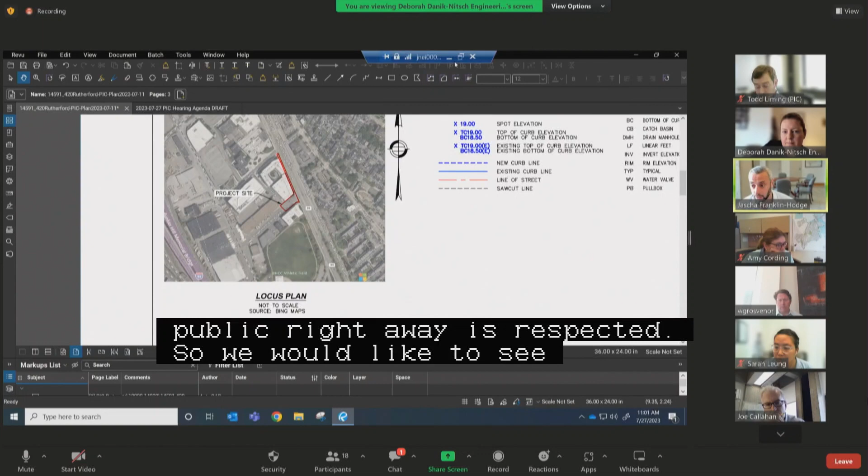And I'd be happy to provide photographs if there's any uncertainty about what we're referring to.

Yeah, I was just about to say, we will definitely follow up with that, and we fully understand your concerns. If you had specific examples or pictures, that would be helpful, because I certainly was not aware of it, but we'll talk with our construction team and make sure there are no issues going forward.

Yeah, and these do date back to an earlier phase of the project, so they may have been resolved already, but that they happened at all is a problem for us. Understood.

Commissioners, any other questions or comments? PIC staff, members of the public?

All right, will you be ready for your public hearing in 2 weeks on August 10th? Yes, we will. We'll follow up on those construction items. Thank you very much, we will plan to see you then. Thank you.

All right, moving on to our next item, new business 3, 44 Ellery Street, Southampton Street, Boston Street, South Boston, widening and relocation, pedestrian easement, specific repairs, on a set of petitions by 44 Ellery LLC. Would the proponents please introduce themselves, their affiliations, and give us a brief overview of the project and the specific actions here.

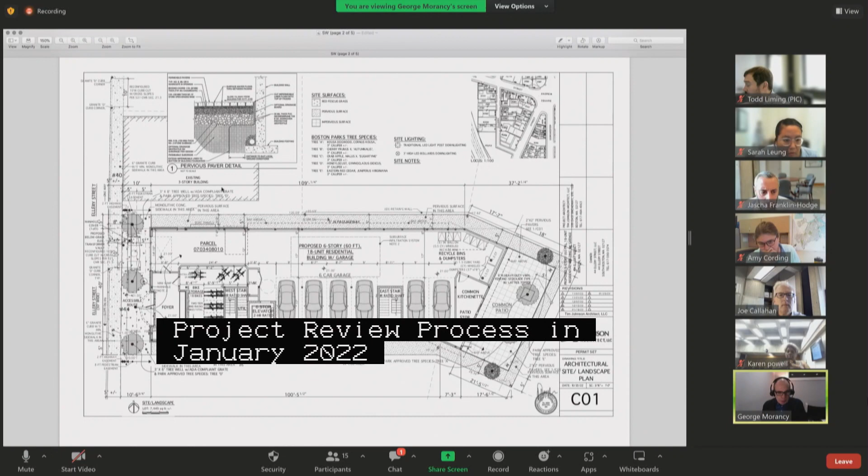The site plan review process by the BPDA and other city agencies necessitated the filing of 3 petitions: one for pedestrian easement, one for specific repairs, and one for widening and relocation of a portion of Ellery Street.

This first plan is the street widening and relocation plan. This is to allow for future widening of Ellery Street adjacent to the 44 Ellery Street site. This widening was requested to be an area of 2 feet wide by approximately 50 feet in length, the width of the site, representing approximately 100 square feet as indicated on this plan. This is the area of the proposed widening.

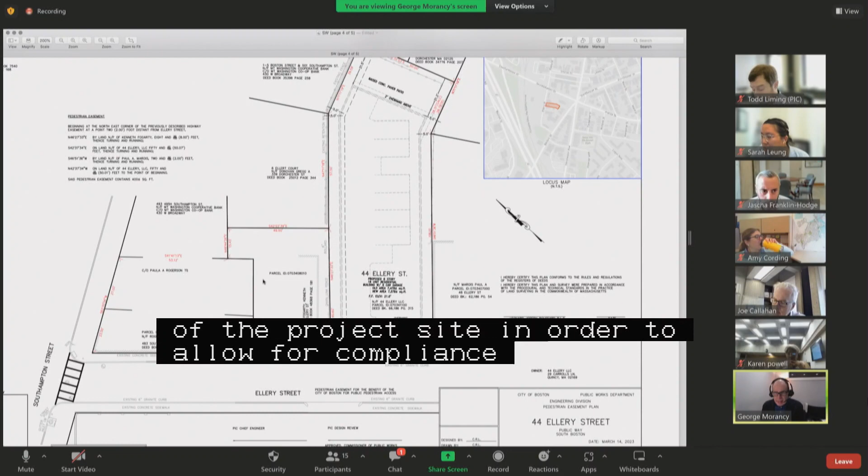The next plan, the pedestrian easement plan, depicts the 8-foot widening of the public sidewalk in front of the project site in order to allow for compliance with City of Boston complete street guidelines, new tree pits, and ADA access requirements. The area of the requested pedestrian easement is 8 feet by approximately 50 feet in length, the width of the site, for approximately 400 square feet.

The third plan is the specific repairs plan, which details the installation of a new 12-foot curb cut on Ellery Street. This would be a standard residential driveway curb cut. Removal of existing cobblestone curbing on a portion of Ellery Street, adjacent to the site. Reconstruction of a portion of the sidewalk on Ellery Street, including directly in front of the site, but also to the left of the site, the westerly direction, as Ellery Street approaches Southampton Street.

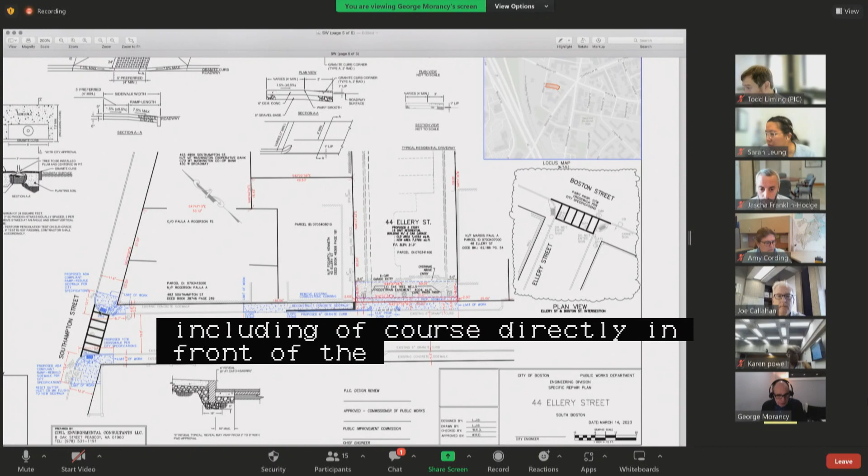Installation of new granite curbing on the same portion of Ellery Street. The installation in front of the site of 3-foot by 8-foot tree wells. In front of the building, the installation of new ADA-compliant pedestrian ramps at the two corners of Ellery Street's intersection with the easterly side of Southampton Street, and on the westerly side as well.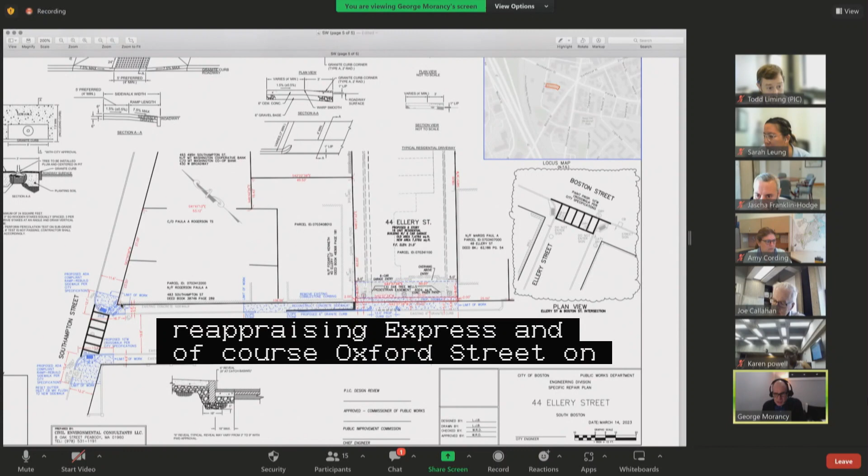These pedestrian ramps would facilitate access to and from the MBTA's Andrew Rapid Transit station on the Red Line, located approximately directly across Southampton Street from the terminus of Ellery Street. These pedestrian ramps, as well as all of the specific repairs detailed on this plan, would involve rebuilding to city standards the sidewalks surrounding the new pedestrian ramps, and the striping of a new 10-foot wide crosswalk meeting city standards connecting the pedestrian ramps.

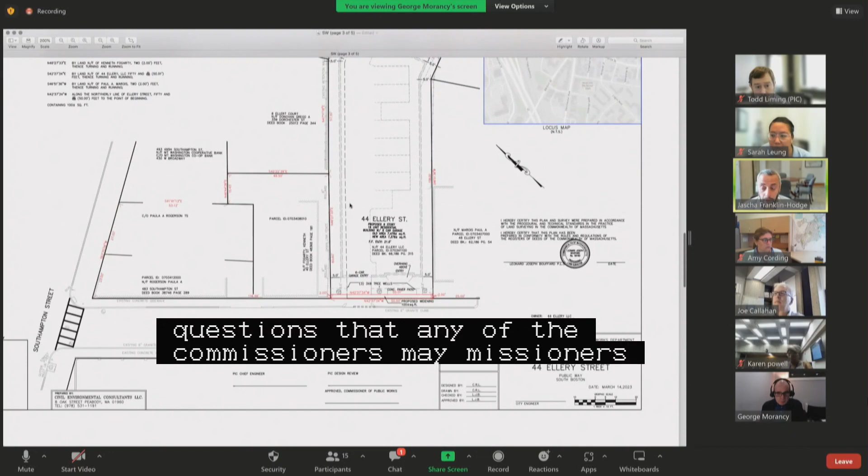With that, I'll pause and take any questions that any of the commissioners may have. Commissioners? PIC staff, members of the public? I think we're all set.

All right, nice and easy. Will you be ready for your public hearing in 2 weeks on August 10th? Yes, Chairman, we will be. All right, excellent, well we will look forward to seeing you then. Thank you very much, thank you.

On to new business 4, Homes Avenue, Mount Ida Road, Dorchester, grant of location on a petition by Verizon New England Incorporated. Would the proponents please introduce themselves and give us an overview of what is being proposed?

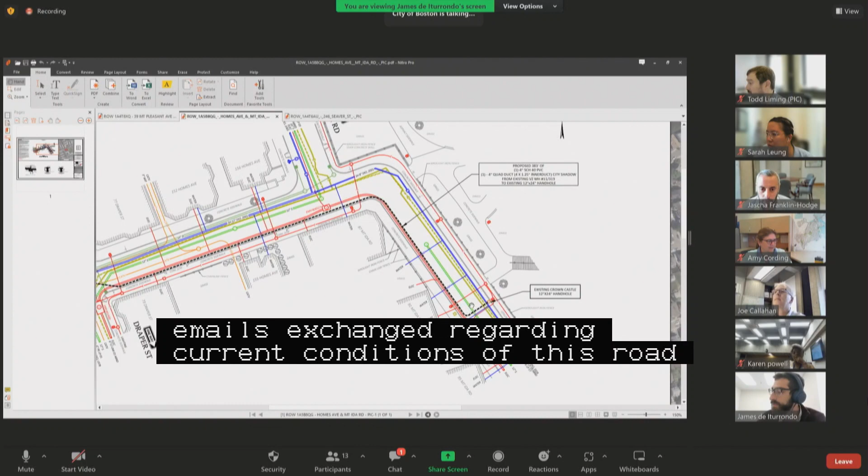James de Iturrondo, representing Verizon New England. Just going to share my screen real quick. Verizon is petitioning to place approximately 383 feet of conduit with city shadow from existing manhole 319 on Homes to an existing Crown Castle handhole. I know there had been some emails exchanged regarding current conditions of this road, and we are working on obtaining photos of the current conditions. Planning to have those, I believe, by the end of this week. Are there any questions or comments?

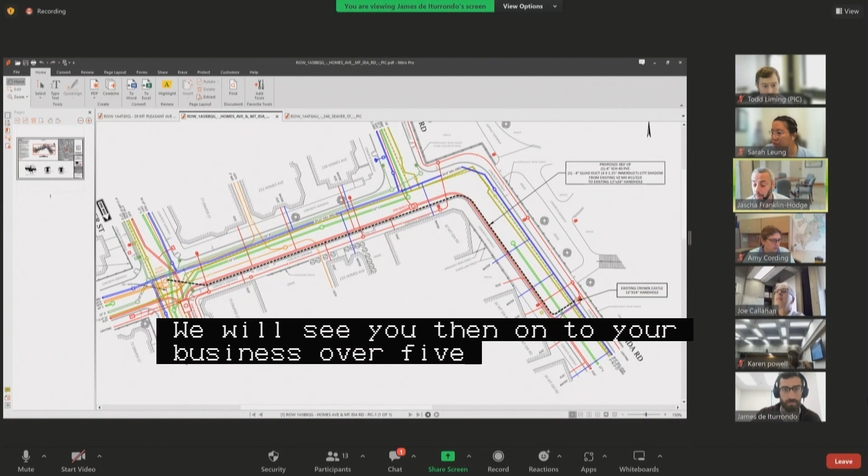On to new business number 5, 246 Seaver Street, Maple Street, Roxbury, grant of location on a petition by Verizon New England Incorporated. Would the proponents please reintroduce themselves and give us an overview of what is proposed here?

James de Iturrondo, again, representing Verizon New England. Verizon is proposing to place approximately 263 feet of conduit with city shadow from existing Verizon manhole 782 on Seaver Street to Extenet shared use handhole on Maple Street. I believe it's the same as the last. We're looking to obtain photos on the existing conditions of the roadway.

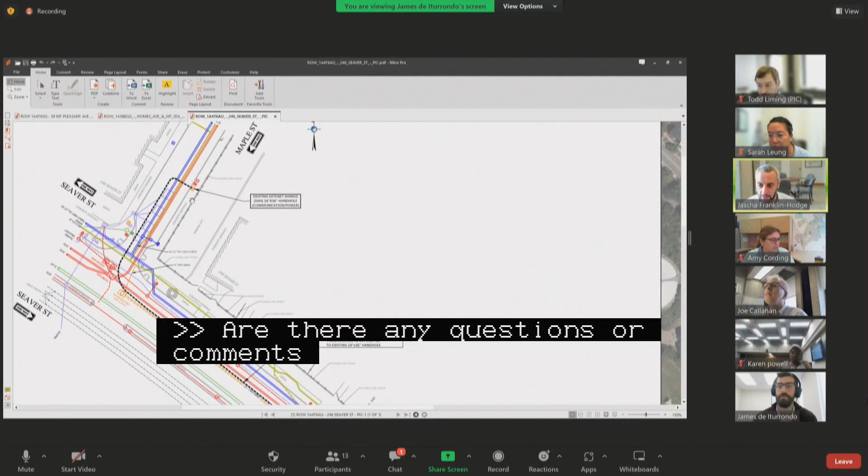I had reached out to Verizon, specifically Karen Levesque, regarding this one specifically, and I let her know that our expectation was going to be that these roadways, both of them, Maple and Seaver, would be resurfaced from curb to curb. Maple curb to curb, on Seaver from sidewalk curb to median curb, I should say, because of the guaranteed street nature and recent resurfacing of Seaver Street as well. And she agreed to that, so just for the record.

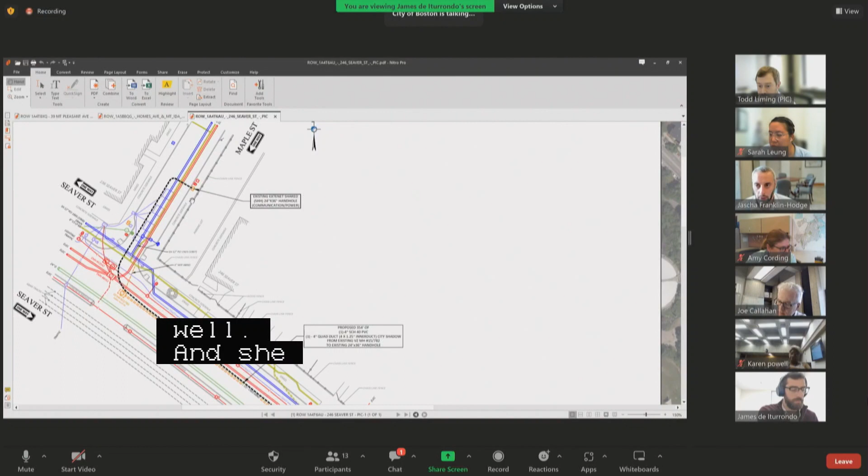And on to our final item, new business number 6, Causeway Street, Boston proper, grant of location on a petition by TC Systems Incorporated. Would the petitioners please introduce themselves, their affiliations, and what is being proposed here?

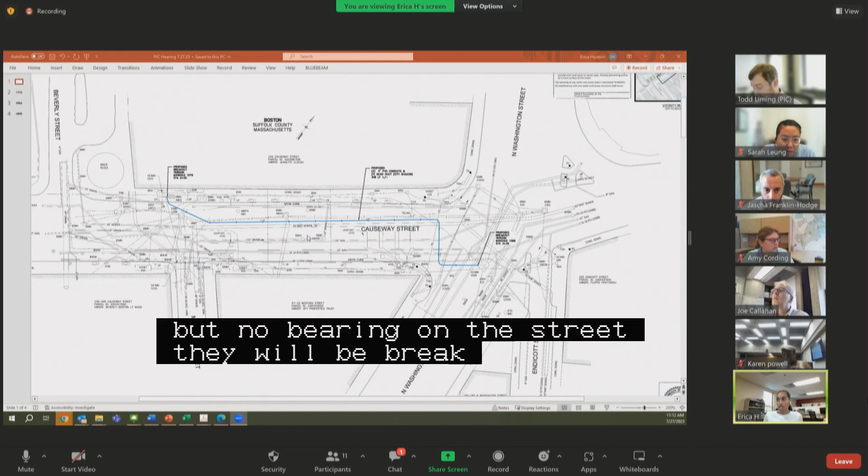Good morning, members of the PIC. My name is Erica Hudson from Sienna Engineering Group, representing TC Systems. TC Systems is seeking grant of location on Causeway Street to place telecommunications conduit with no participants. Starting on Causeway Street, we will be breaking out of Verizon manhole number 1075 and continuing northeast onto the intersection of Causeway Street and North Washington Street to Verizon manhole number 1068. The conduit will consist of 2 4-inch PVC conduits and 1 quad duct city shadow, which will be a total of approximately 346 feet.

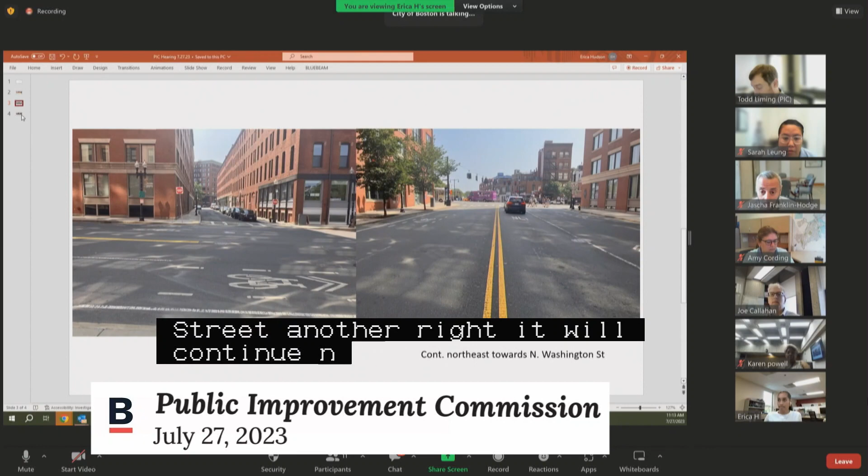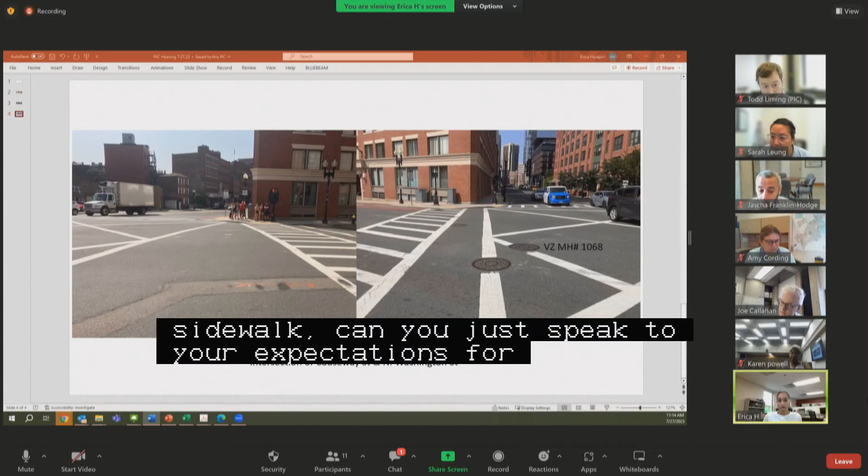and accessibility on the sidewalk if you are indeed trenching across that concrete? Yes, so we will make sure to restore the sidewalk to its current condition or better, and we will also make sure to make a pathway for pedestrians and ensure... Sorry, go ahead, finish, please. Yeah, we will just ensure that it's safe for the pedestrians along the sidewalk as well.

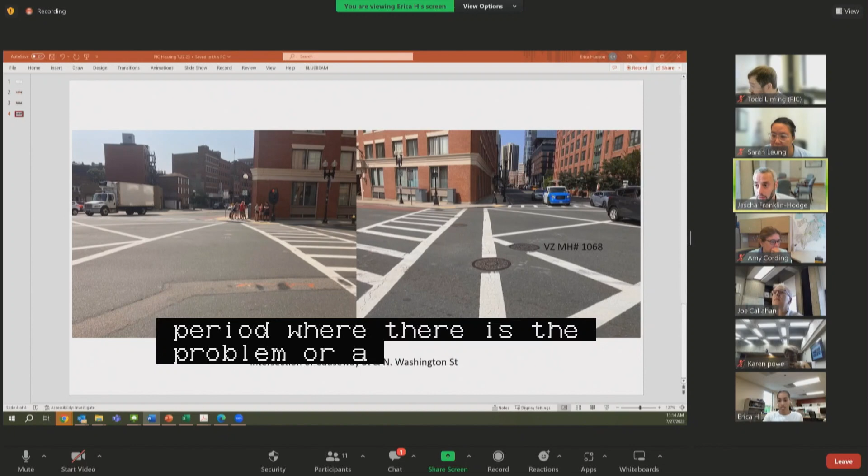Okay, it would be helpful, given that this is a very high pedestrian traffic environment with both a stadium and a major transit hub, to make sure we understand any interim impacts and expected timeline for restoration, to ensure there isn't some extended period where there is a problematic path or a condition in which the sidewalk is closed and large volumes of pedestrians are being detoured. So this is a place where getting your plan for how this will be constructed and restored, and timing expectations, in advance of your public hearing would be appreciated. Okay.